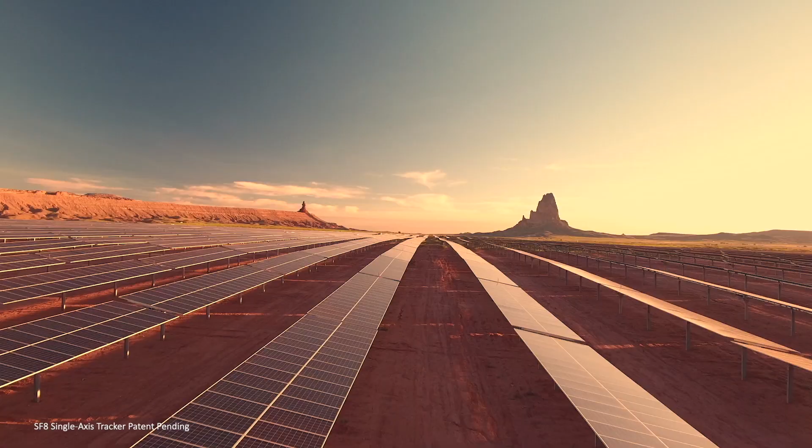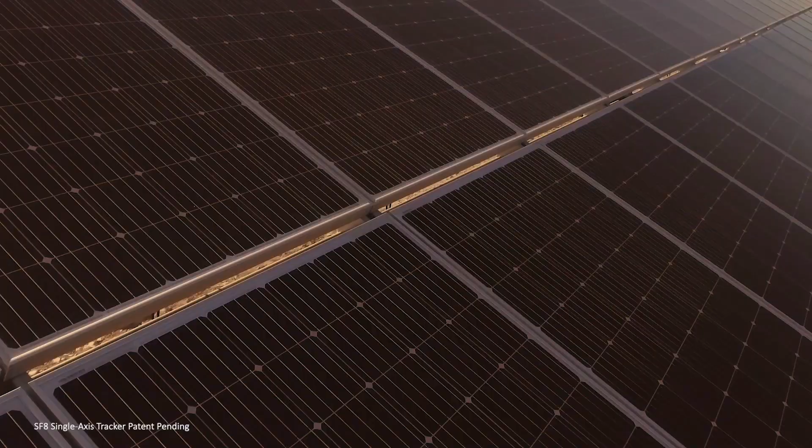What is greatness? It lies within us. Moving forward toward a better world, achieving the impossible, going further, taking it to the next level, to the next challenge, pushing boundaries, discovering, doing, thinking, designing, creating, and never, ever giving up the pursuit. That is our greatness, and this is our SF8.

SF8, engineered for greatness.

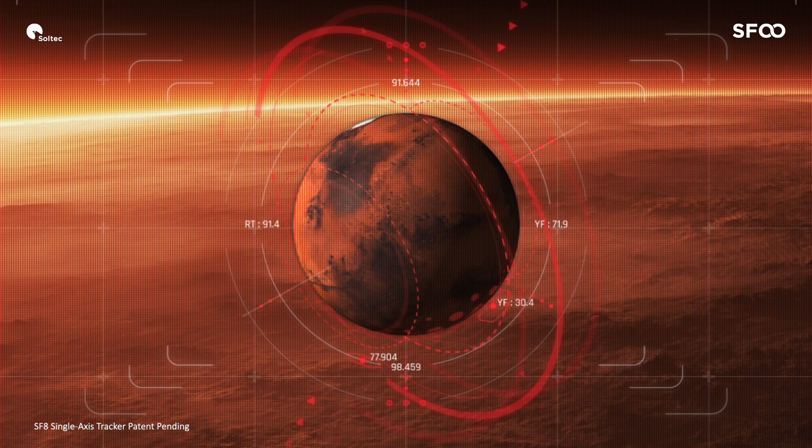Okay, so here we are in Mars, the place where we're going to discover the SF8. Whilst we navigate through the planet, we're going to introduce the attributes of this new product.

Its first differentiating feature is its robustness. I have with me the General Manager of Soltec Industrial, Sergio Lopez, industrial engineer with more than 20 years of experience.

Sergio, I understand that the SF8 is 22% more rigid than the previous generation of Soltec trackers. You know it in depth. How would you describe this new tracker?

Well, the new SF8 tracker is full of innovations that we have developed based on our experience of more than 7 gigawatts delivered. The principles that have guided us in this innovation phase have been to provide a more robust tracker that will respond better to the effects of the wind, apply the knowledge acquired in the past few years, and implement the requirements of our customers in terms of ease of assembly, increase in production, etc.

There are changes that you can see at first sight in the tracker, but others go unnoticed, like our monitoring and defense algorithms, the control system of the plant, and many small parts that solve many problems, particularly when you need to supply more than 50,000 equipment units a year.

And these things are what make our tracker the best in the market, although it might seem the same as those of the competition. Why is this tracker more robust?

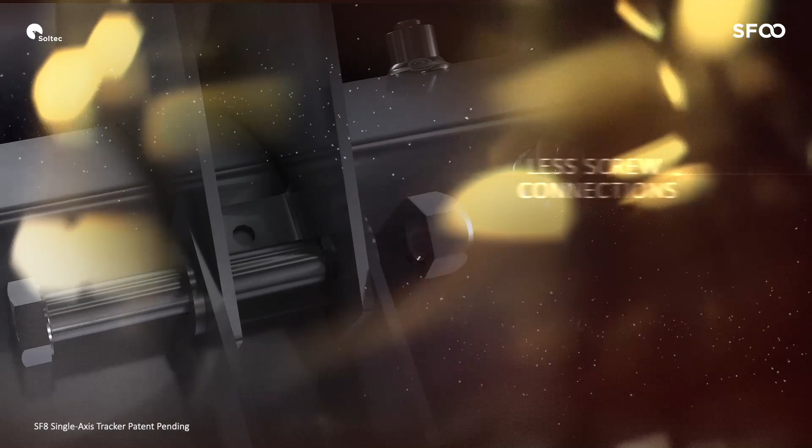Hector, tell me, why is it that the SF8 introduces a significant change in how we conceive solar energy? Well, it does introduce a significant change, not only because of its innovations that we've heard about in this presentation, but also because we made sure we understood what the client is looking for and how to include that in the design of the tracker.

I speak every day to our main clients in Europe, Africa, and the Middle East, and most of them coincide in that they're looking for three things, very important things for them. The first one is for the tracker to maximize energy production as much as possible, that it be reliable and competitive price-wise. And if we put all these needs together, that is how we have approached the design of the tracker.

Maximizing power production is something that has always been part of this company. At the end of the day, we should not forget that what we're doing in the industry is to generate renewable energy and try to make it as cheap as possible. And for that, we need to look very carefully at what the trends are.